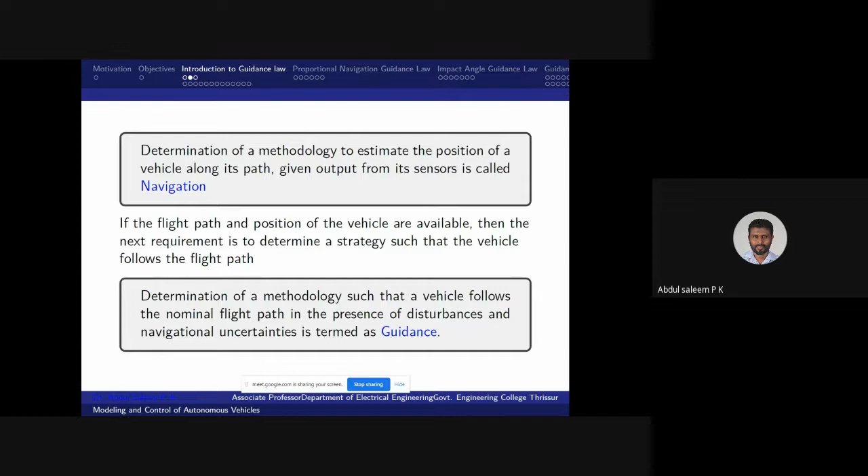Now we have to determine a methodology by which the vehicle can follow the nominal path. Suppose this is a nominal path. Then we have to develop a methodology by which the vehicle, that is the missile, is able to move along this path, or follow this path. That methodology, that strategy, is known as guidance.

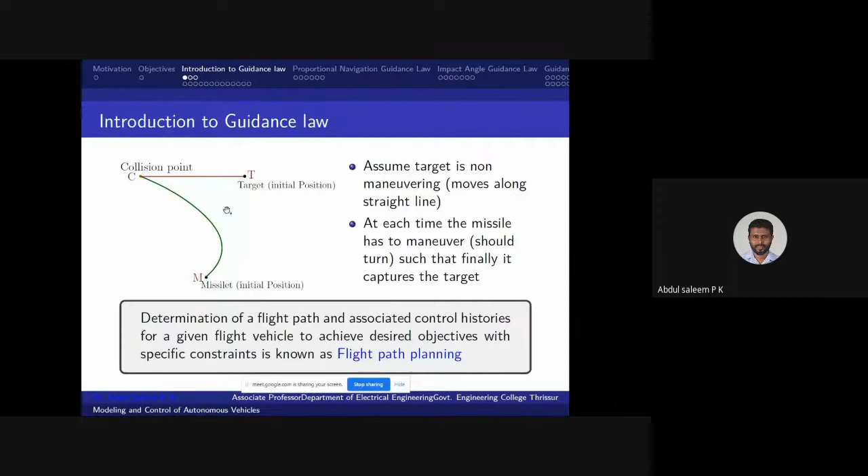Also, in order to achieve this, we have to make sure that the orientation, the angular orientation, is along a particular direction, and for that a control is required. But this is some basic concept about navigation, guidance, and control.

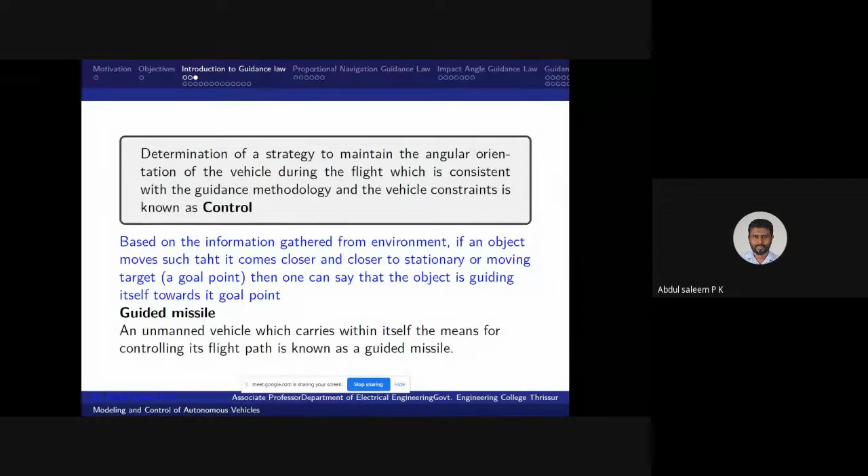Based on the information gathered from the environment, if an object moves such that it comes closer and closer to a stationary or moving target, then we can say that the object is guiding itself towards its goal point. A guided missile is an unmanned vehicle which carries within itself the means for controlling its flight path - this is known as a guided missile.

Now we can have some basic concepts on interception and avoidance. In the case of a missile, the primary objective is interception, that is, the missile should hit the target. Whereas in the case of robots, the main objective may be to avoid an obstacle. Therefore, these two things are actually two sides of the same coin. If we have a strategy that can be used for intercepting a target by a missile, then the opposite strategy can be used to avoid an obstacle by a robot.

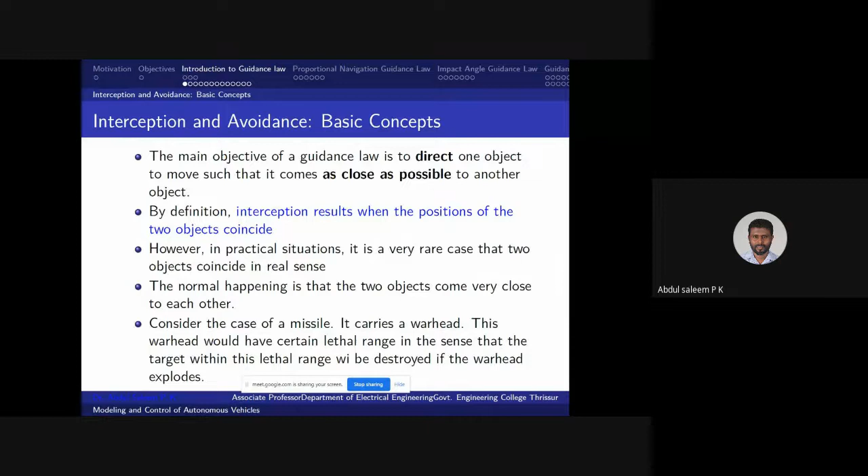Now we will discuss the engagement between two-point objects. Here we assume that we are not applying any guidance law. If we are not applying any guidance law, what is the condition so that a missile will hit the target? If we know that condition, we can develop a methodology such that this condition is satisfied. Once this condition is satisfied, we can ensure that the missile hits the target. Therefore, first we will consider a case where the missile is unguided.

So here we have a missile M and a target T. This is the directional velocity of the missile, and this is the directional movement of the target. We assume that there is no maneuvering.

Now we have some definitions. The distance between the missile and target is known as line of sight, usually denoted by the letter R, also known as range or LOS separation. The angle made by this LOS with respect to a reference, for example the x-axis, is known as the LOS angle, denoted by theta. The angle made by the velocity vector of the missile with respect to a reference axis is denoted by gamma, the flight path angle. Similarly, we can have the same definitions for the target also.

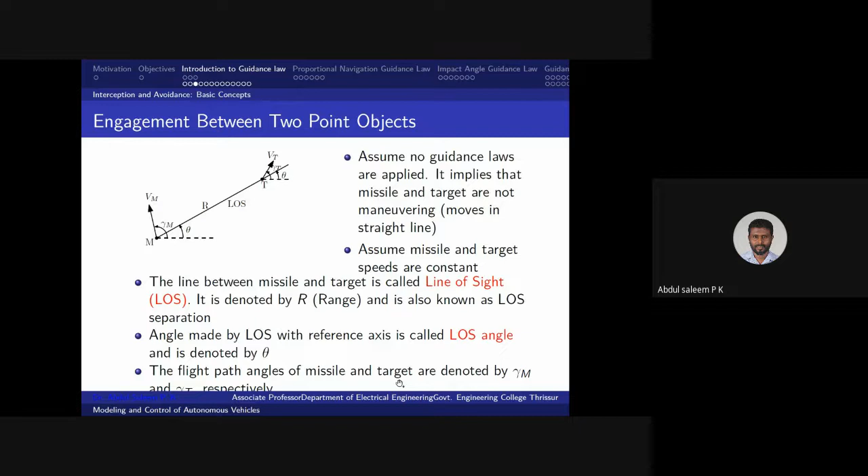Now we can think about the modeling of the kinematics of the engagement between this missile and target. What we are doing is that this velocity vector of the missile is resolved into two components: one along the direction of the LOS, and the other perpendicular to LOS. The same way, we resolve the target velocity also into two components, one along the LOS direction and the other perpendicular to LOS.

Therefore, this component VMR, the component of missile velocity along the LOS, can be obtained as Vm into cosine of this angle. But this angle is actually gamma_m minus theta. Therefore, VMR equals Vm cos(gamma_m minus theta). Similarly, we get V_m_theta equals Vm sin(gamma_m minus theta). In the same way, we can resolve target velocity into two components given by similar equations.

But here we assume that Vm, Vt, gamma_m and gamma_t are all constants. Therefore, the only state variables are r and theta. Therefore, in order to develop a mathematical model, we have to find r dot and theta dot.

So r dot is the velocity along this direction, dr by dt. But that is nothing but the target velocity minus the missile velocity components. Therefore, Vtr minus VMR is the velocity along this direction. So r dot will be equal to this expression, equation 1.

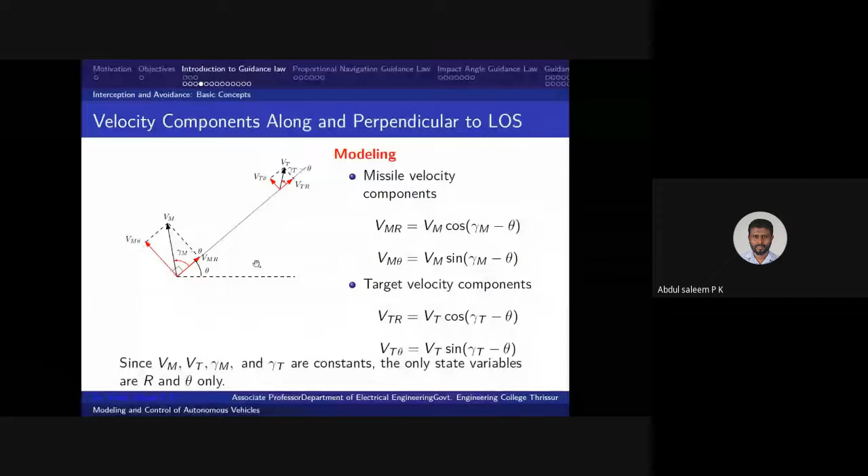In the same way, V_theta, which is also equal to r into theta dot, will be equal to the difference of the velocities along the direction perpendicular to LOS. This velocity component minus this velocity component will give you r theta dot. Therefore, these are the two state equations or engagement equations for this case.

Now, using these two equations, we can develop a methodology to derive the condition for capturability of the two vehicles, the missile and the target. For that, first we will obtain a V_theta-VR trajectory. V_theta is the velocity along a direction perpendicular to LOS, that is r theta dot, and VR is r dot, the velocity along the LOS direction. We can get many interesting results if we draw this V_theta-VR curve.

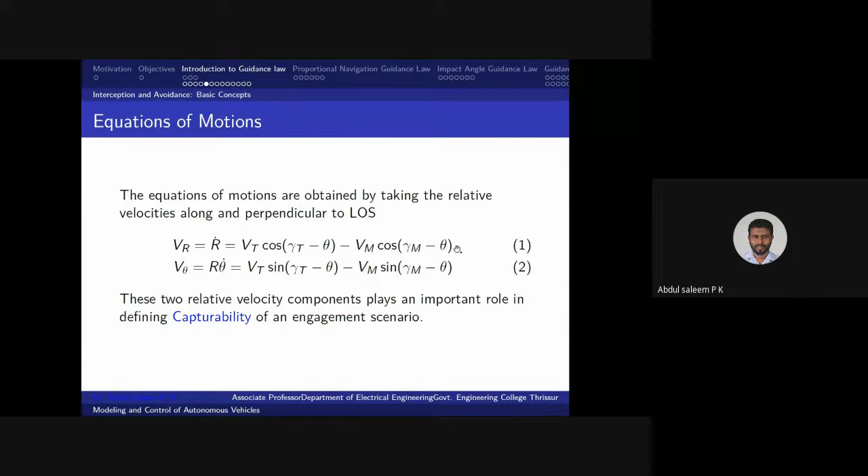For that, first we will find VR dot, taking the derivative of this equation, VR dot or r double dot. If you differentiate this with respect to time, we get Vt sin(gamma_t minus theta) into minus theta dot. Similarly, Vm sin(gamma_m minus theta) into minus theta dot. Therefore, we get an expression which can be simplified into theta dot into V_theta, because Vt sin(gamma_t minus theta) minus Vm sin(gamma_m minus theta) is what we already defined as V_theta. Therefore, we get an equation like this one.

Similarly, we can obtain the other equation, V_theta dot is equal to minus theta dot into Vr.

Now, in both expressions, we have theta dot. Therefore, from here, theta dot is equal to Vr dot by V theta. And from this equation, theta dot is equal to minus V theta dot by Vr. We have got this equation.

Now we can integrate both sides, and we will be getting Vr square plus V theta square is equal to C square. It is clear, it's obvious, that this equation represents that of a circle with radius C. How can we get C?

By substituting the initial condition, we can get the value of C, obtained by this equation. Therefore the trajectory Vr, V theta will be a circle of radius square root of Vr naught square plus V theta naught square.

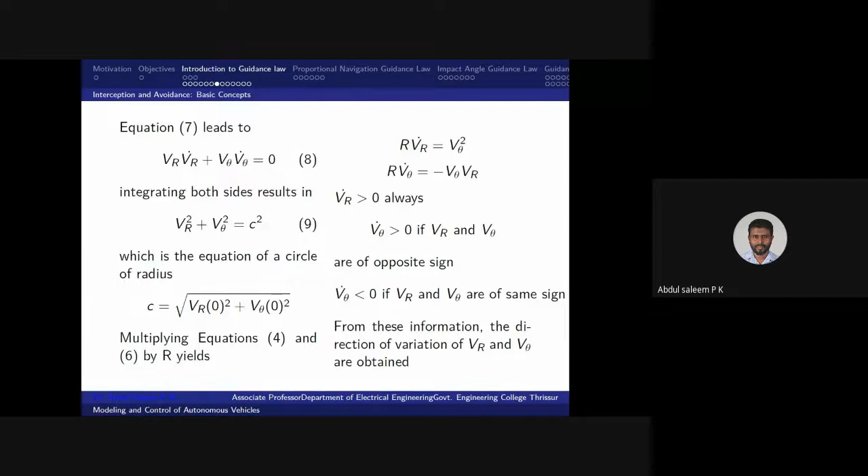That is, when V theta is equal to 0, both Vr dot and V theta dot are 0. So you substitute V theta equal to 0, then Vr dot is equal to 0, V theta dot is equal to 0. That is, once V theta is equal to 0, or theta dot is equal to 0, then it is a stationary point. After that, as time increases, the trajectory will not change, or the values of Vr and V theta will not change.

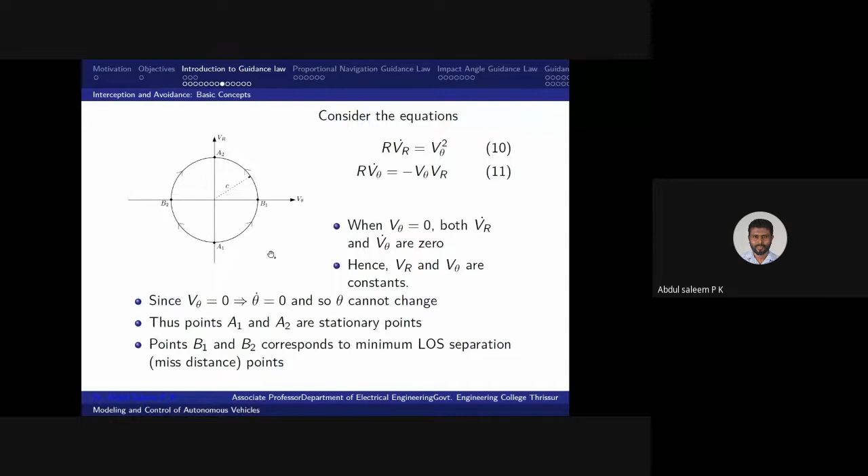Now we will see three different cases based on these discussions. I will show you one by one.

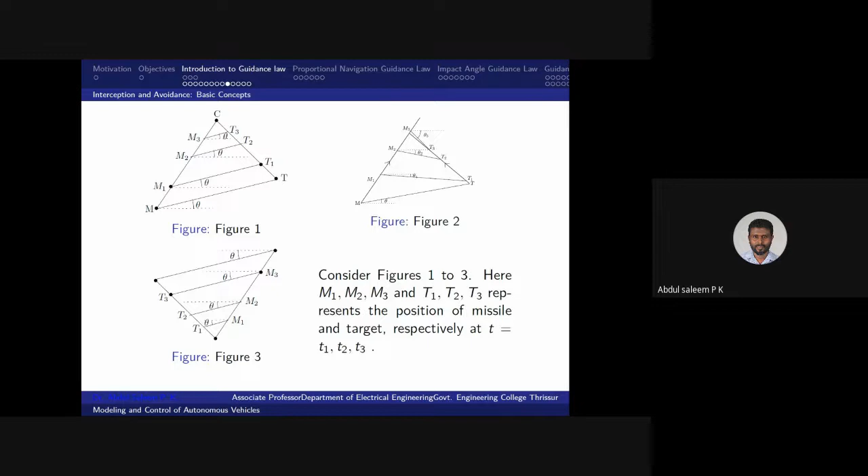First case: this is called a collision triangle. Initially, missile is here and target is here. Missile is moving along this direction and target is moving along this direction. At t equal to 0, this is the position. At t equal to t1, this is the position of the missile and target. The LOS angle, with respect to the x-axis reference axis, is theta. This is the case for t equal to t2 and t equal to t3. But you can see that in all these cases, theta is same.

There is no change in theta. If that condition is satisfied, then theta dot will be 0, that is, it is a stationary point. Then one more thing you can see is that as the engagement proceeds, the distance between missile and target is decreasing, and finally they will collide at this point.

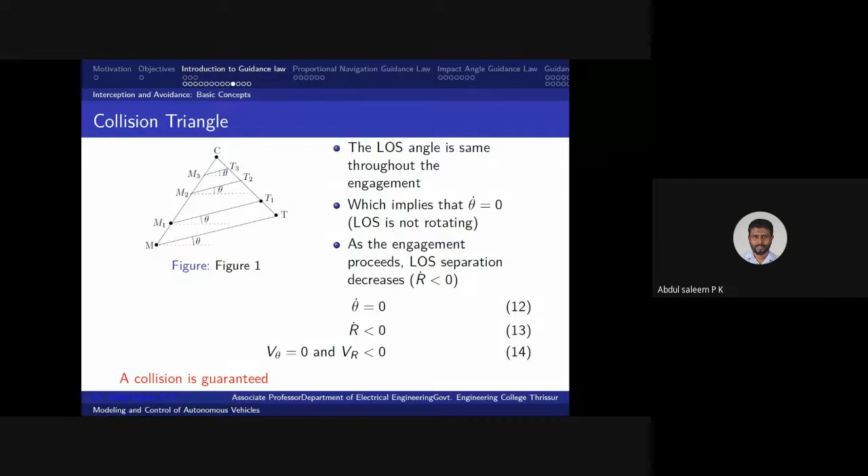From here we get an interesting result: in order to guarantee that a collision is possible or achieved, theta should not change. Theta dot should be 0, or theta should be constant. Also, the distance between missile and target should decrease as the engagement proceeds. Therefore, the conditions are theta dot equal to 0 and r dot less than 0, or v theta equal to 0 and vr less than 0. These are the conditions that must be satisfied in order to achieve a collision between missile and target.

Now, here is another case where we can see that the values of theta are not the same. They are different here. You can see that even though the values of theta seem to be increasing, it is increasing in the negative direction. Therefore, actually theta is decreasing, so theta dot will be negative in this case. Anyway, theta dot is not 0.

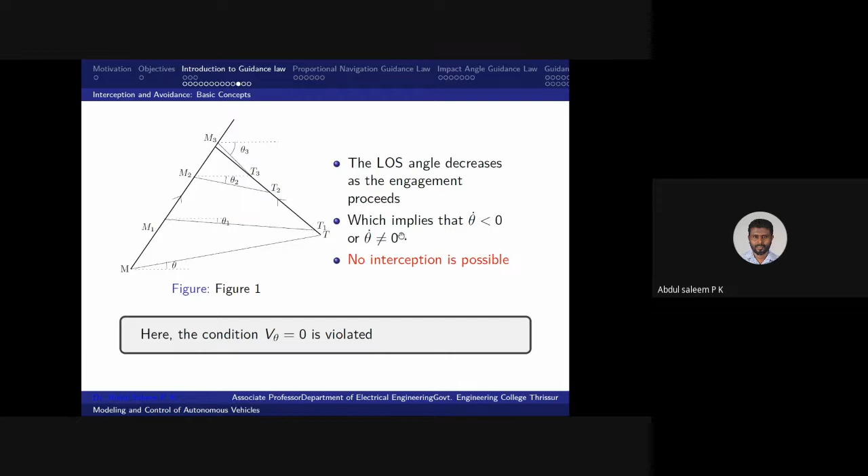Also, this distance between the target and missile is decreasing. That condition is satisfied, but the other condition, theta dot equals 0, is not satisfied. Finally, you can see that no interception is possible, because at this point the missile is here and the target is here only. Therefore interception is not possible. After some time, missile will go here and target will go this way. So collision is not possible in this case, because the first condition, theta dot equals 0, is not satisfied. Therefore, no collision.

The third case: here you can see that theta is the same throughout, that is, theta dot equals 0. First condition is satisfied. But this is the initial case, this is t equal to t1, t2, t3, etc. Here we can see that the distance between missile and target is increasing as the engagement proceeds, and we can see that it is not possible to have an interception.

Therefore, what we can conclude is that the condition for a guaranteed collision between the two is that theta dot should be equal to 0 and r dot should be less than 0. If these two conditions are satisfied, then definitely a collision will be achieved. If theta dot equals 0 and r dot is greater than 0, then no collision is possible. In that case, if avoidance is our objective, this condition can be used.

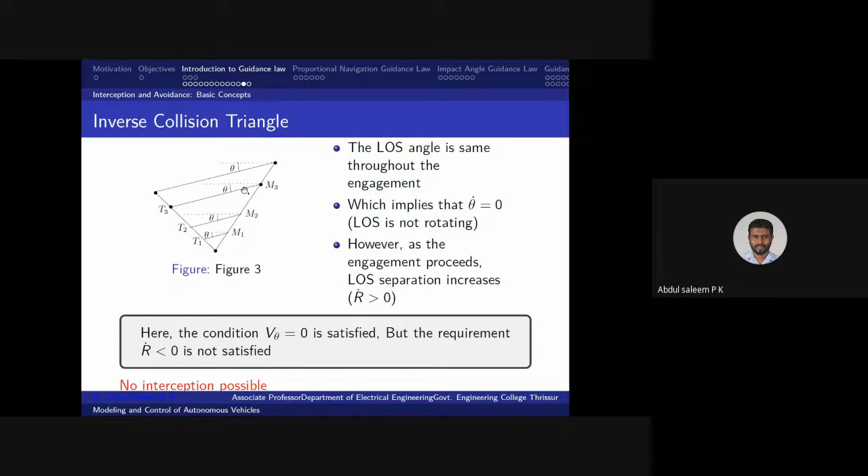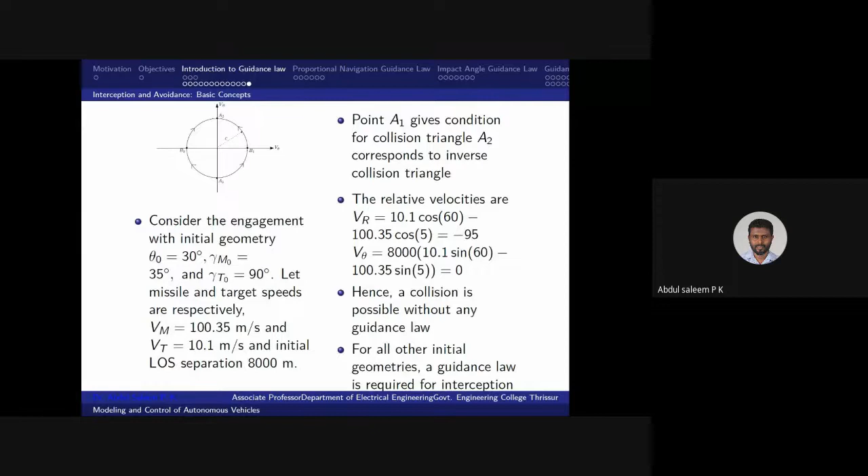Only for this particular initial condition is collision possible, provided you are not applying any guidance law. What we are going to do is apply a guidance law such that these two conditions are finally satisfied. Once satisfied, a collision will be possible.

Now we will discuss some guidance laws. One is proportional navigation guidance law, also known as PN guidance law. This is one of the most widely used guidance laws because it is very simple and easy to implement, and it is robust. Now we can see how this PN guidance law is developed, or what is the history behind it, the development of this guidance law.

Earlier, now we know that the mariners are using some sophisticated instruments, but in earlier days it was not so.

Therefore, what is the thumb rule that mariners were using to avoid a collision with other ships? There may be a number of ships, and each ship should make sure that it is not colliding with any other ship.

The thumb rule they used is: when a neighboring ship appears to be stationary and seems to be growing in size, a collision is imminent.

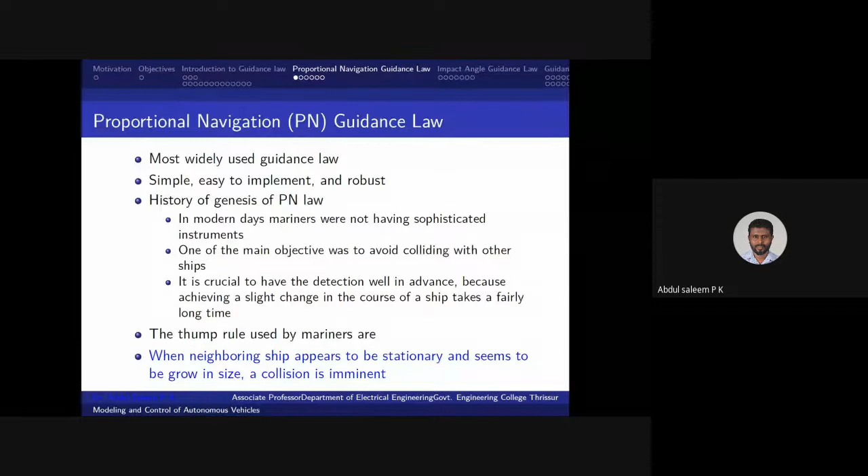That is, if the people in a particular ship feel that the other ship is stationary, and also feel that the size of the other ship is growing, then surely a collision will occur. But that is the analysis we can have.

The other ship appearing stationary with respect to our ship implies that the line of sight between the two ships is stationary, that is, the line of sight is not changing. If the other ship seems stationary, it means the line of sight between our ship and the other ship is constant, not changing. That is, theta is not changing.

V theta is equal to 0. And the second condition, that is, the size of the other ship seems to be growing, implies that the LOS separation between the two is decreasing. That is, VR is less than 0.

Actually, they were using these two conditions: V theta should be equal to 0 and VR should be less than 0. If these two conditions are satisfied, then they know a collision is sure, and therefore they have to maneuver such that a collision is avoided.

Actually, these are the two conditions which are necessary and sufficient to ensure that an interception of the missile with the target is possible. These two observations were used in designing the proportional navigation guidance law.

The second observation, VR less than 0, can be achieved if the missile is launched approximately towards the target or predicted collision point. If the target is moving, we find the predicted collision point, and the missile should be pointed towards that point. If stationary, the missile should be pointed towards the target point.

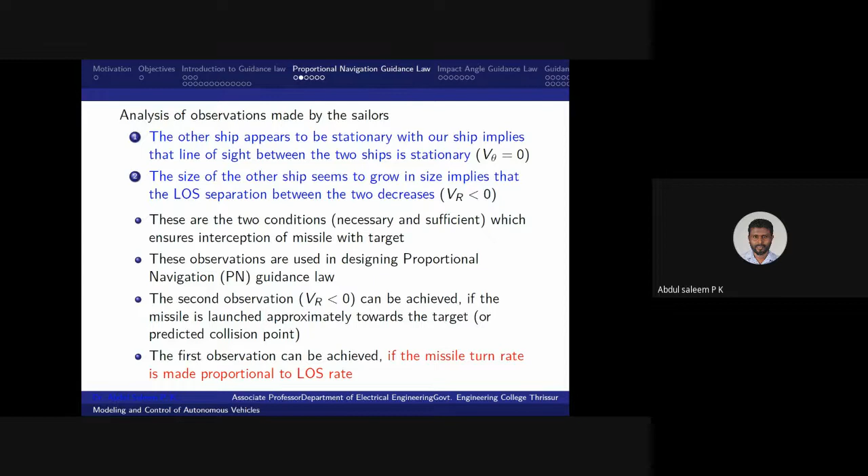If that condition is satisfied, then the first condition can be achieved. Therefore, we can write the guidance law as gamma m dot, the missile turn rate, proportional to the LOS turn rate theta dot, or gamma m dot is equal to n theta dot. This n is known as the navigation constant or PN constant.

Therefore, the lateral acceleration will be equal to this turn rate multiplied by velocity, that is, n Vm theta dot. This is the guidance command applied to ensure a collision between a target and missile is possible. This is known as the PN guidance law.

I will show some simulations.

So we can assume we have a missile target engagement with these initial conditions: initially the missile velocity vector is at 60 degrees, the target velocity vector is at 45 degrees, the initial LOS angle is 30 degrees, and the initial separation between the two is 7,000 meters.

Also, we assume the target velocity is 250 meters per second and the missile velocity is 400 meters per second. One more assumption: the target is non-maneuvering.

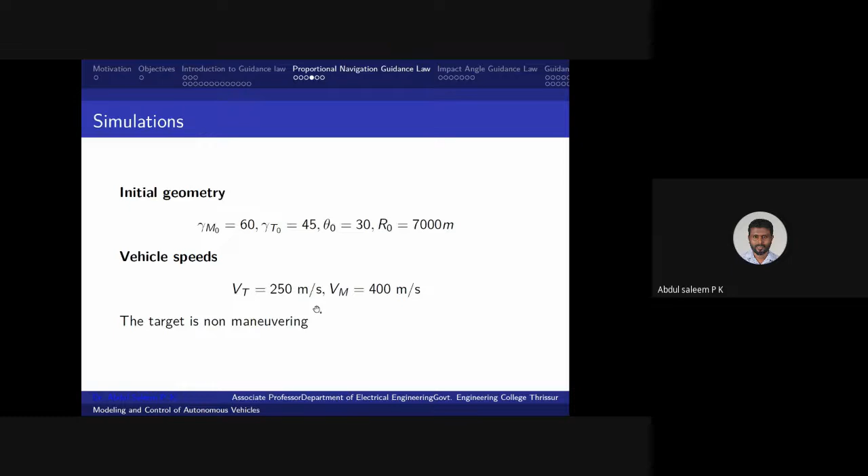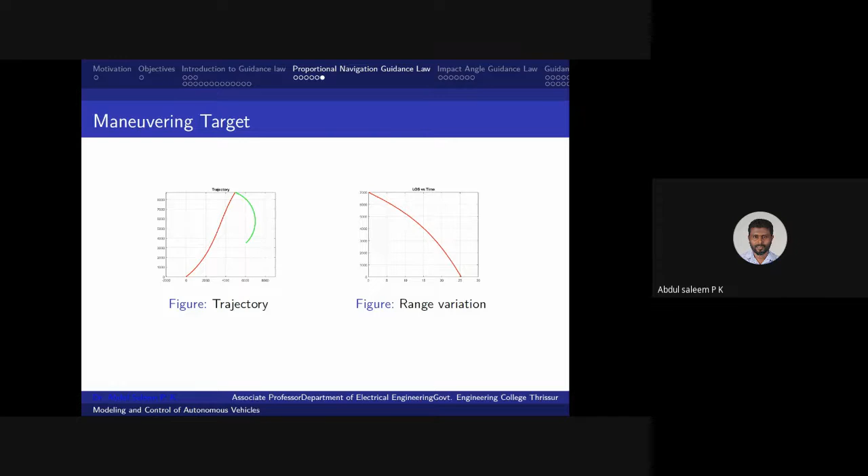There are a number of guidance laws. I am not going to discuss all of these guidance laws. If you are interested, you can go to the literature and see different types of guidance laws.

Now we will see the impact angle guidance law. Impact angle means the angle at which the missile finally hits the target. It can be 90 degrees, or 30 degrees, or 40 degrees, etc.

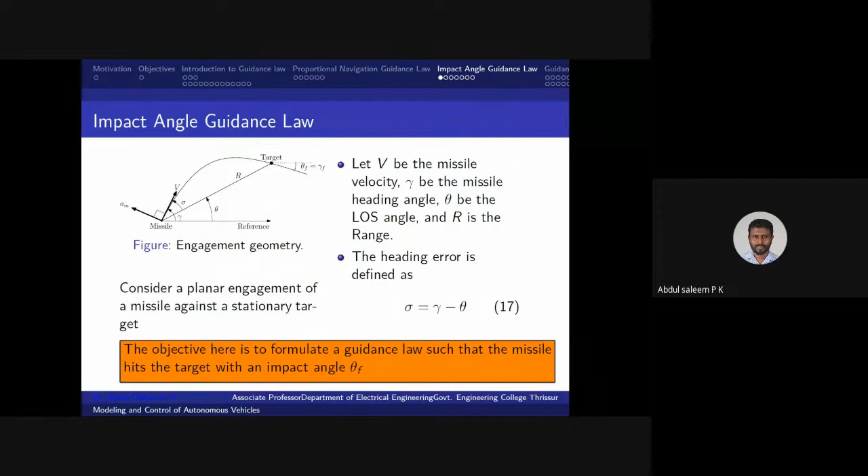See here, suppose this is a target, but we can hit it like this. If this is the reference, the angle is 90 degrees, therefore theta f is equal to 90 degrees. Or we can hit the target like this, in which case theta f is equal to 0. Or we can hit the target like this, then theta f is maybe minus 30.

The direction at which the missile hits a target is very important for destroying that target. Depending on which direction you hit along, the disaster will be more severe. Therefore, the final angle is important to achieve a more effective collision of the missile with the target, or to destroy the target. Now, how can we achieve this desired impact angle? That is the next discussion.

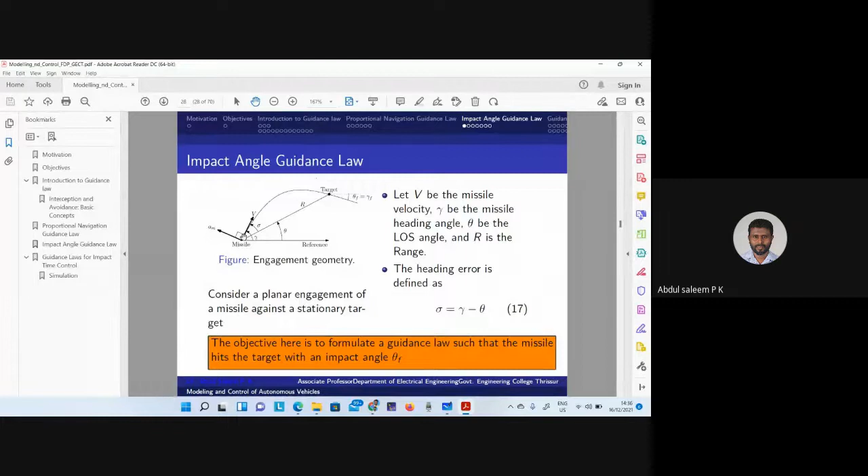Similarly, r theta dot is equal to minus v sin sigma. Why? Because here also the target velocity is 0 since it is stationary, and the component of this velocity along the direction perpendicular to the LOS will be equal to v sin sigma. Therefore we get minus v sin sigma equals r theta dot, or theta dot equals minus v sin sigma divided by r. And gamma dot is equal to n theta dot. That is the guidance law, that is, we are applying the PN guidance law.

If you are applying the PN guidance law, gamma dot is equal to n theta dot, and this expression will be changing with respect to the guidance law that we are using. But these two are the basic kinematics, that is fixed. This is the controlling factor. By changing this gamma or gamma dot, we are controlling the flight path. Therefore, different researchers will be using different guidance laws, and accordingly this gamma dot expression will be changing. Since we are using PN guidance law, we have written gamma dot is equal to n theta dot.

Now, in order to achieve a desired final angle, we need a relationship between the final impact angle and the navigation constant n. If you get such a relation, then you can compute the value of n and use it. That is the idea being used here. For that, we can integrate, but before that we can do something.

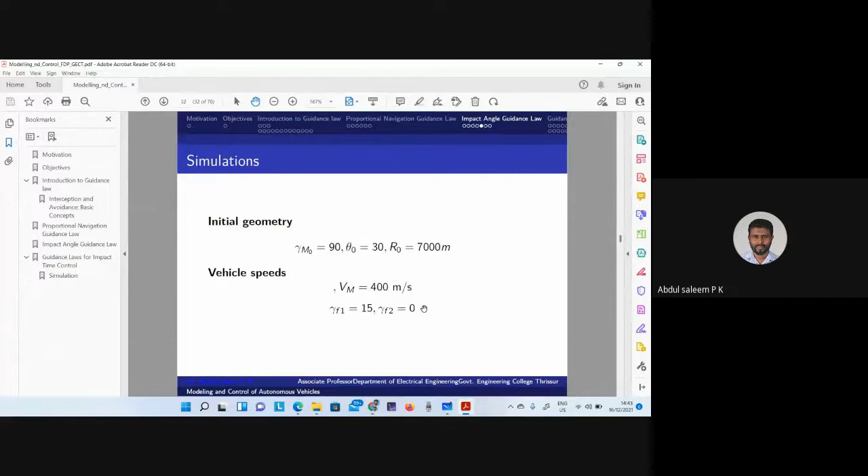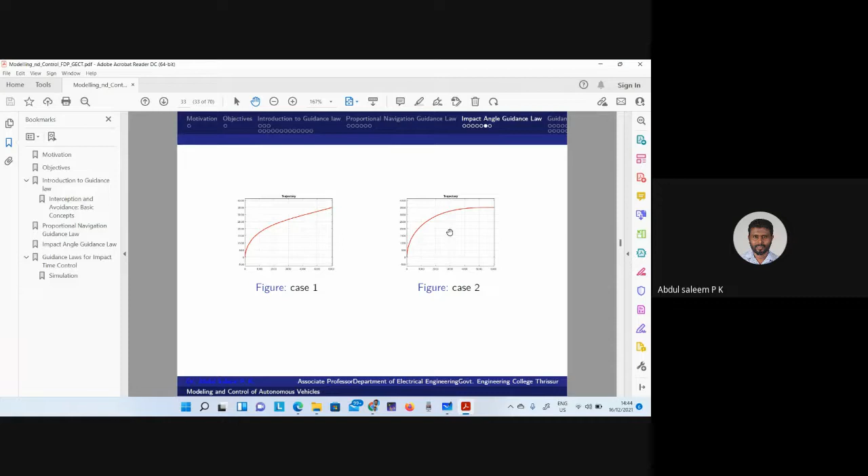And for the second case, our objective is that the desired final angle should be equal to 0 degree. It is very obvious that it is achieving 0 degree at the interception time. Therefore, by using this methodology, we can achieve a desired impact angle.

The strategy we have used is that our guidance law is N*V*theta_dot, where the value of n is computed such that we achieve a desired impact angle. For that, we should have a relationship between n and gamma_f, which also depends on the initial conditions.

That formula we have obtained here. Therefore, if you compute n using this formula - sigma_0 known, theta_0 known, and gamma is our desired final impact angle - substituting these values, you get the value of n. And if you use that n, you will be able to achieve the desired impact angle.

But there are some issues. If you are using PN guidance law, there is a condition that n should be greater than or equal to 2, otherwise your final acceleration will be infinity. I am not going to discuss that, but note this result: n must be greater than or equal to 2.

So if you substitute n equal to 2 here, this will be theta_0 minus sigma_0. But that is the minimum possible final impact time, the minimum possible value being theta_0 minus sigma_0.

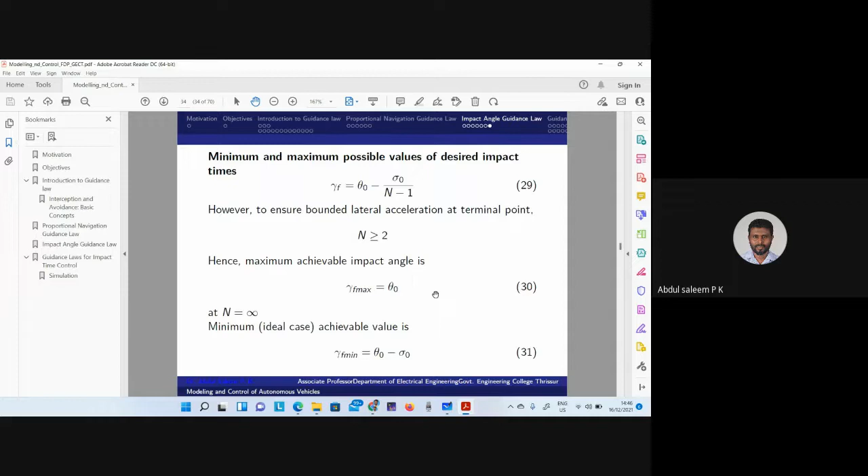Therefore, there are some limitations if you use this methodology, and there are so many papers in literature where they were able to achieve the full 360-degree impact angle, meaning any desired impact angle is possible. Some guidance laws were developed for this; you can see some papers in the literature.

And finally, we will discuss guidance laws for impact time control.

As I explained earlier, the primary objective is that the missile should hit the target. But besides this main goal, there are some other constraints. For example, the impact angle constraint that we have seen, and also a constraint on the time at which the missile hits the target.

For example, suppose I say that my missile should hit the target at t equal to 20 seconds. But there is a constraint: it cannot be 21 seconds, it cannot be 19 seconds. It should reach there exactly at 20 seconds. Why so? I will explain.

Suppose a ship of an enemy nation is coming to attack our country. Then we should destroy that ship, and for that we may launch a missile to destroy that missile. But that ship has some self-defense mechanism known as Close-In Weapon System, CIWS.

By using this mechanism, the ship is able to destroy the missile that we have launched. Therefore, our objective is not satisfied - we have failed to achieve our goal.

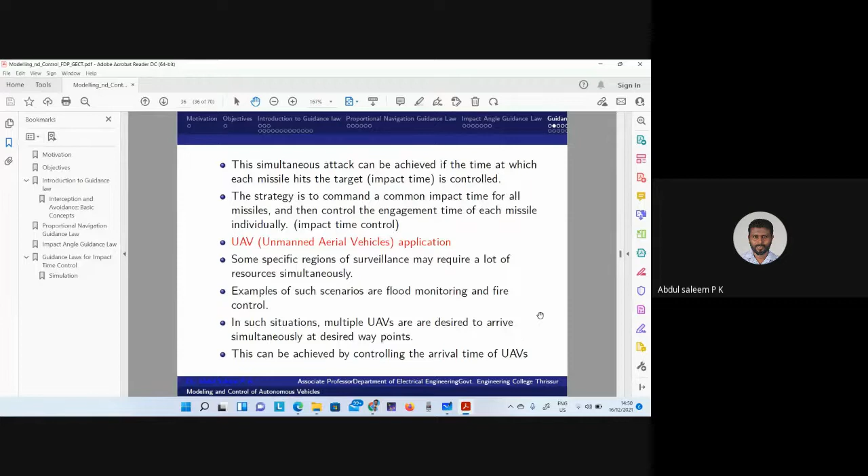One method is that we will control each of the missiles individually such that they are all commanded with a common impact time. For example, suppose I have 4 missiles and I am commanding my desired impact time as 30 seconds for all the missiles, and I am applying this guidance strategy. Then each of these missiles will move using the guidance command applied to it, and all of them will reach the target point at t equal to 30 seconds, and they will succeed in their mission. That methodology is used in this explanation.

The objective is that we have to develop a formula for AM so that it will satisfy two conditions: one, it will hit the target; second, it will hit the target at a desired predefined impact time. The objective is to find a proper guidance law governing AM, which can guarantee a desired impact time TF. By using this guidance law, we should be able to have a simultaneous impact of multiple missiles at that predefined impact time TF. That is our objective here.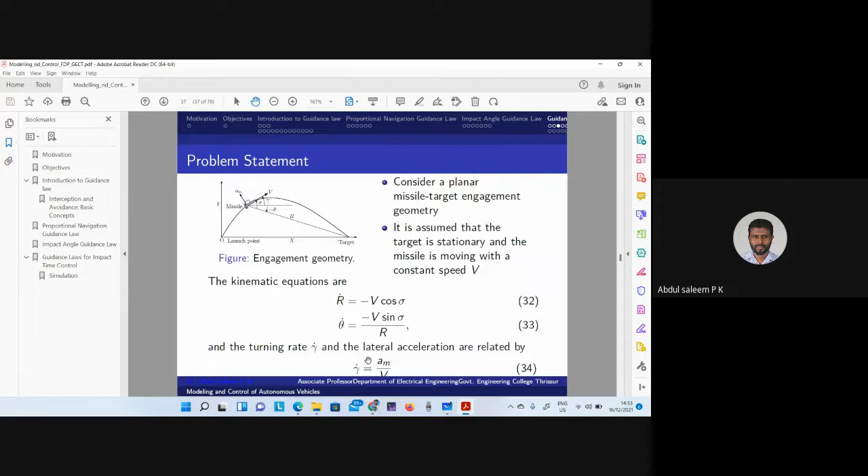Now, if the velocity of the missile is constant throughout, or if we consider the average velocity, then we can see that a missile moving along the longer path will have maximum impact time, and a missile moving along the shorter path will have minimum impact time. Therefore, in order to get different impact times, we can vary the path lengths. Path lengths can be varied by varying the turn rate gamma dot, and gamma dot can be varied by varying the lateral acceleration AM. Therefore, our objective is to find an expression for AM so that a desired gamma dot is obtained, and thereby we will be able to achieve the desired impact time.

Now, first we can go for PN guidance law. The PN guidance law guidance command is A equal to N V theta dot. Now, the parameter we can vary theta dot by is N. As we have done for the case of impact angle, we should be able to get an expression for N, which is a function of the desired impact time. Then we will be able to control the final arrival time of the missile. But we can see whether it is possible or not.

This is the PN impact time. You can calculate the expression for the impact time using the PN guidance law. For this, we have already seen these equations. This is the heading error, gamma minus theta. Actually, we want to control gamma dot. But gamma dot can be controlled by controlling sigma dot or theta dot. But theta dot we cannot control, it is a kinematic equation.

Therefore, the only thing is that we can control sigma dot. By controlling sigma dot, we will be able to control gamma dot, and thereby we will be able to control the turn rate, and thereby we will be able to get different path lengths, so that different types of impact times can be achieved. I have already explained how this expression is obtained: sigma dot is equal to n minus 1 theta dot.

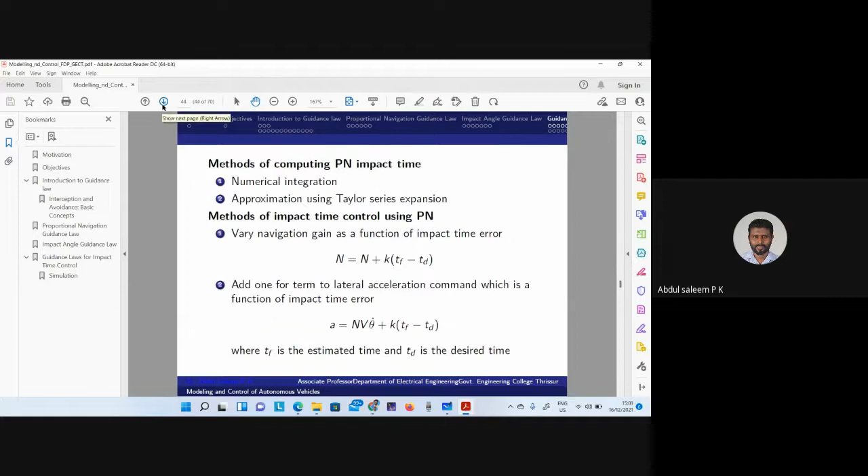Then how can we solve this issue? Our research problem is: can we formulate a guidance law such that an exact closed-form solution for the impact time is possible? Also, the impact time can be controlled by a parameter which is an exact closed-form expression in terms of the desired impact time. This is the research problem that is addressed to me.

Fortunately, or for my luck, I was able to solve this problem, and I will explain how this problem is solved.

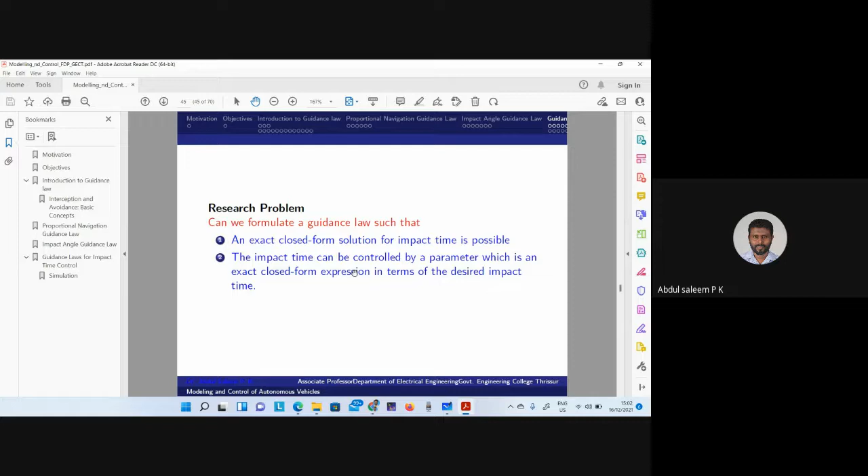Now I will explain the control formulation. I assume that my initial heading error is between this range, minus pi by 2 and plus pi by 2. That is my assumption. I am proposing a two-phase variation in the heading error sigma as a function of the range R, as shown by equations 46 and 47. There are two phases. In the first phase, the heading error varies according to this expression.

In the second phase, the heading error will be 0. This is up to fR0. If your range, initially R0, is decreasing, and when the range reaches fR0, where f is between 0 and 1, a fraction - suppose f equals 0.8 and R0 equals 10,000, 0.8 into 10,000 is 8,000 - if the value of r reaches 8,000, then this will be 0. After that, the heading error is 0 throughout.

This is the variation in heading error that I assume satisfies this equation. Why have I chosen this equation? We can see later that if I choose a heading error variation as given by these two equations, then I'll be able to integrate an expression for impact time. That is the objective. I am proposing a function - a variation for the heading error - such that that function is integrable.

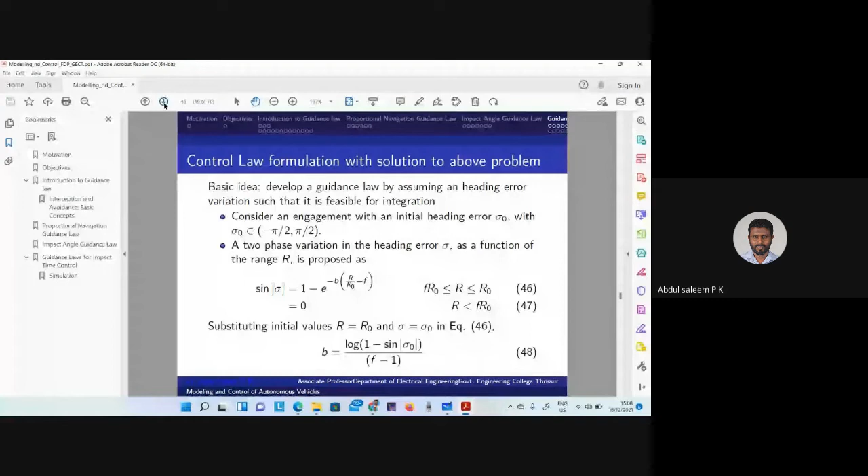Now we can derive the expression for impact time. This was our expression: d sigma by dt is equal to this expression. Therefore, I can take the terms containing sigma to this side and dt to this side. Then we get an expression like this: minus v dt is equal to r0 by b into sine sigma by 1 minus sine sigma d sigma.

Now this is easily integrable: minus v into integral from 0 to tc, because at r equal to f r0, the time is tc only. So integral 0 to tc dt is equal to r0 by b, integrated over sigma from sigma 0 to 0. Initially the heading is sigma 0, and finally at the end of the initial phase, sigma is equal to 0. So the sigma variation is from sigma 0 to 0, and this is the expression. You can see that the expression d sigma by 1 minus sine sigma is easily integrable, and the integral is 1 minus tan sigma 0 minus sec sigma 0, divided by v.

That is, we have got a closed form expression for tc. For the first phase, we have got a closed form expression for this, tc. Now we can find the expression for impact time for this one, that's tf minus tc.

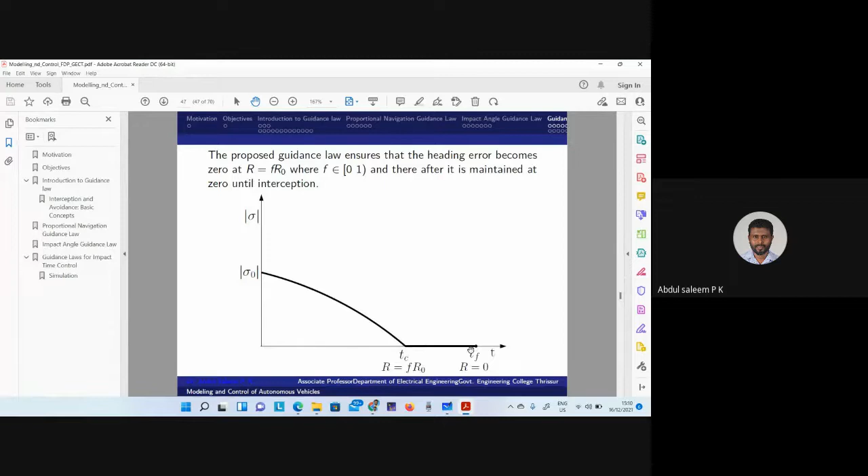Phase 2, the heading error is 0. Therefore, heading error 0 means it is moving along a straight line. There is no curved path. In that case, the time is just distance by velocity.

But distance is f into r0, because at that time r is equal to f r0. The distance is f r0, speed is v. Therefore, if you divide f r0 by v, you get the time for the second phase. The total time is the sum of these two times, giving an expression like this.

This is a closed form expression for the impact time. It contains the parameter f, it contains the expression for the desired impact time, and it is exact. Therefore, now we have to find an expression for the control parameter as a function of the desired impact time, which we can obtain from here.

Before that, I will find the maximum and minimum possible impact time. For that, I should know how the impact time varies as a function of f, where minimum value of f is 0 and maximum value is 1. As f increases from 0 to 1, how does the impact time vary, increasing or decreasing or remaining constant? To know that, we can take the derivative of this function with respect to f.

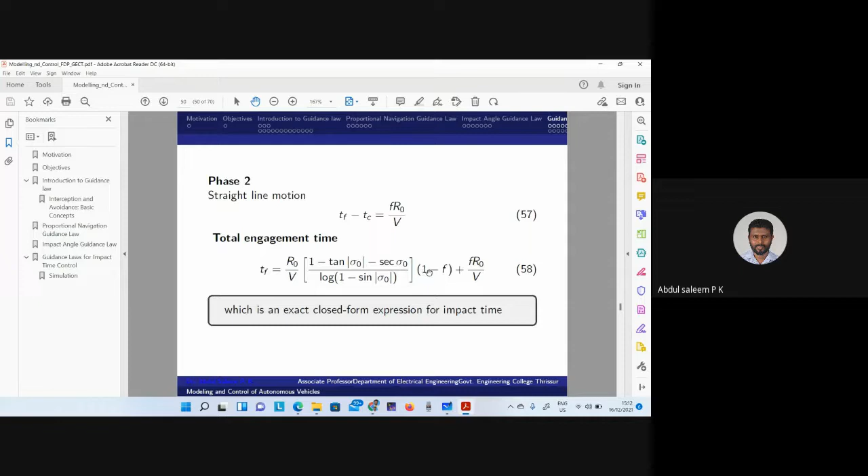Now these two can be substituted in this expression. This can be written as tf max and tf min, so tf equals tf max into 1 minus f plus tf min into f. That expression is written here. Therefore, we have a simple expression for the impact time: tf is equal to 1 minus f into tf max plus f into tf min.

Tf max and tf min can be obtained by computing using these expressions, so we can find tf min and tf max. From this we can get an expression for f. This expression is closed form and exact. Therefore, we have an exact closed form expression for the control parameter f.

F is a function of the desired impact time and also the initial condition, because tf max and tf min are functions of the initial conditions. Thus I have developed a guidance law where we have an exact expression for impact time, an exact closed form expression for this control parameter, directly related to the desired impact time.

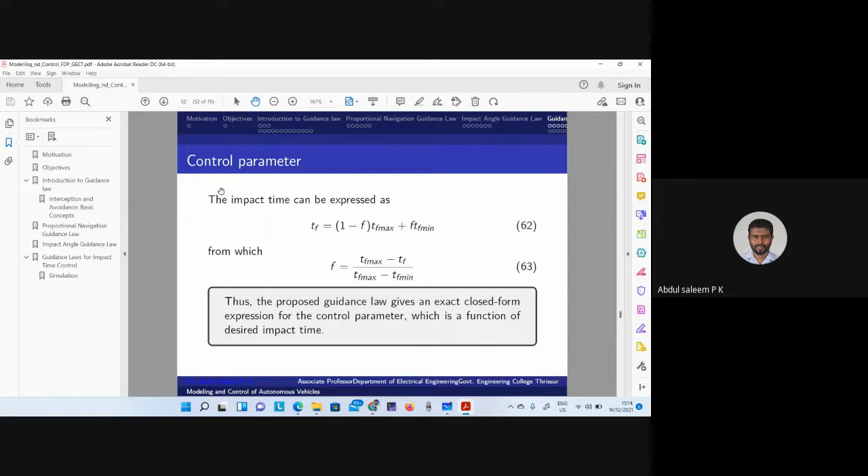Therefore, if your desired impact time is 30 seconds, you just put tf equal to 30 seconds here, compute f, and substitute this f value in your guidance law. You will be able to achieve a collision exactly at tf equal to 30 seconds. But the only constraint is that the tf you select should be between the tf max and tf min computed by the above two expressions.

Therefore, the guidance law algorithm is: first compute tf min and tf max using those equations, then get a set of permissible values of tf. But tf min is not actually achievable since it is an ideal condition requiring the lateral acceleration to be infinity. Any value greater than tf min is possible, and tf max is also possible. So it is a closed bracket on one side and an open bracket on the other.

Now select a tf from this set S. Then find the control parameter using that equation, compute B using equation 48, and generate AM by substituting this f and B. You will be able to achieve the collision with the exact impact time.

As I explained in the case of the impact angle problem, here also there can be disturbances or autopilot dynamics by which the achieved acceleration may not be the same as the commanded acceleration. There will be some time lag between the achieved acceleration and the commanded acceleration. Therefore, our guidance law fails to achieve the desired impact time if you use the guidance law that we obtained earlier. If you use this algorithm, then you will fail to get the desired impact time and collision because of this autopilot dynamics.

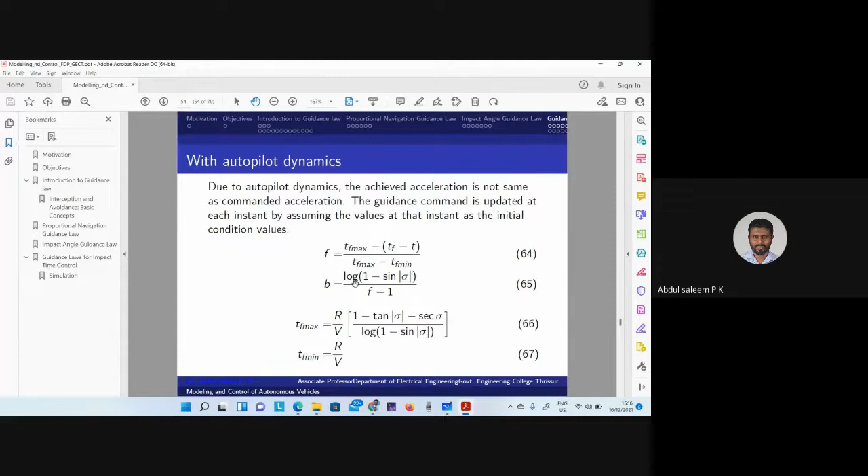Now we can see some simulations. These are the initial engagement and velocity of the missile. The initial position of the missile is at 0, 0. First we find TF min and TF max, and they are obtained as 25 and 30.0741 seconds, and we can choose a time in between these two. That is, from this set we can choose a time. I have taken 28.4 seconds as my desired impact time.

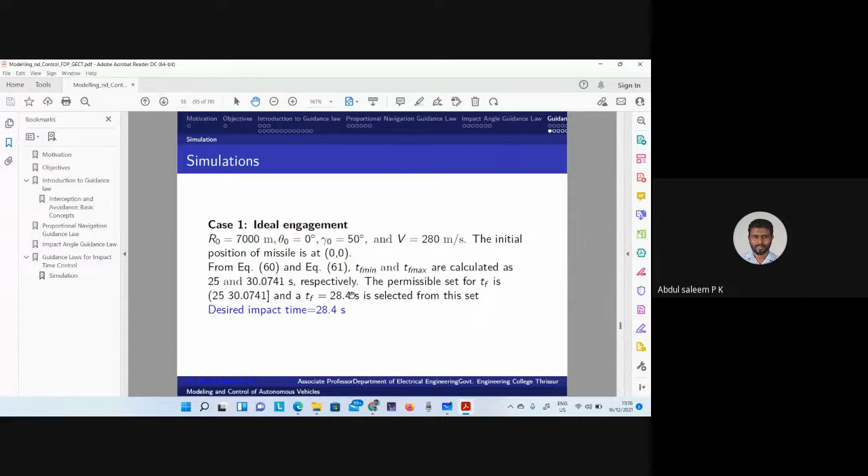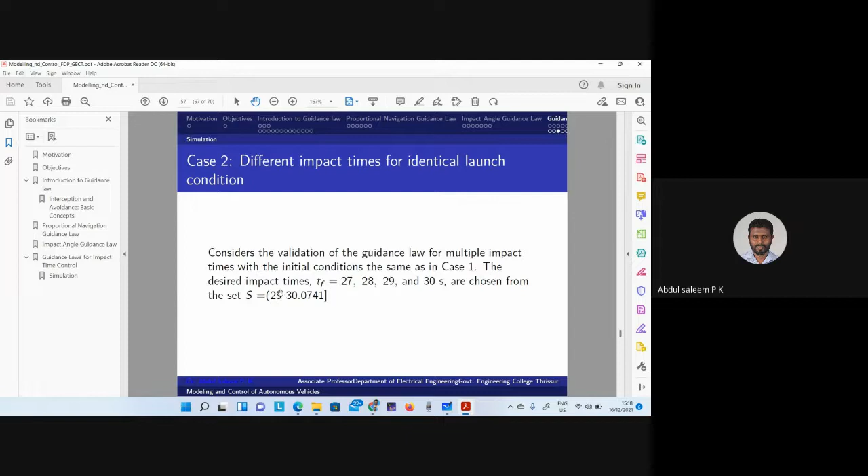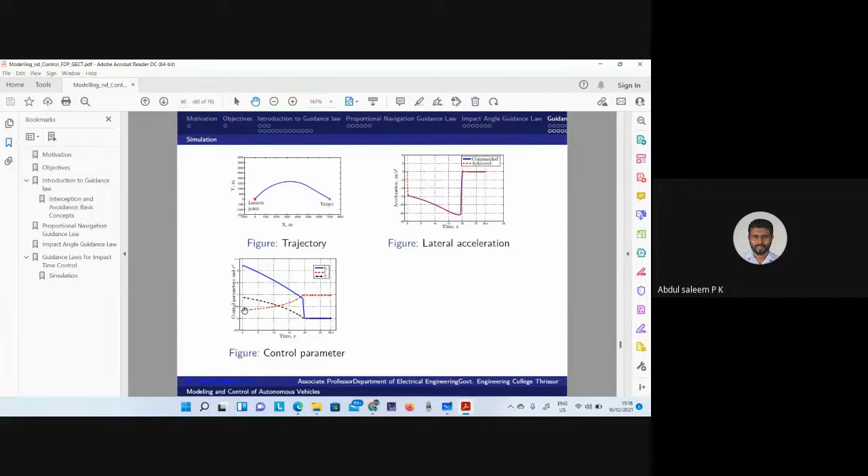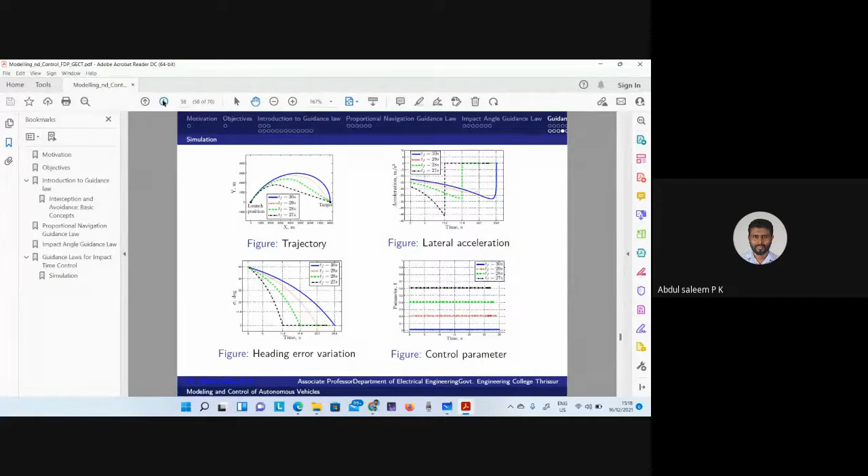Now, feedback control with autopilot delay. We assume that an autopilot delay of 2.2 seconds is present. In that case also, our guidance law is able to achieve collision at exactly the desired impact time of 28.4 seconds. But you can see here that the control parameters are varying, not constant, whereas in the ideal case the control parameters are constant - B and F are constant there. But if you consider feedback control, the control parameters are not constant.

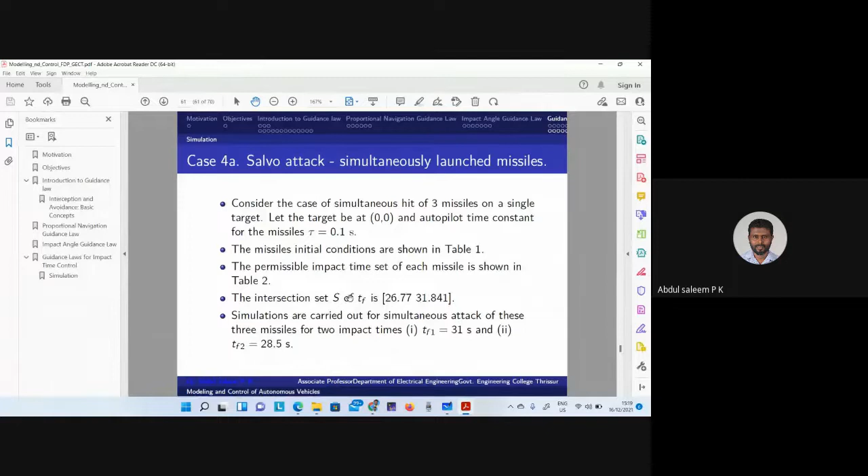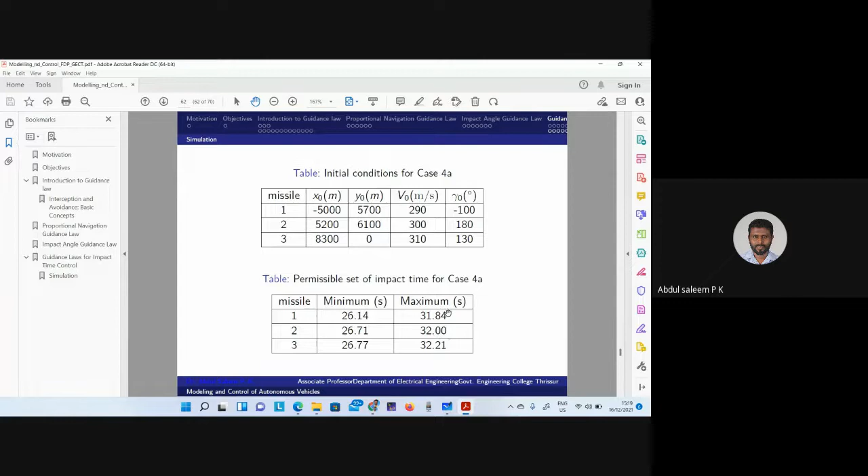Now, salvo attack means we have to achieve a simultaneous attack of all missiles. What we can do is find the impact time set of each of these individual missiles, then find an intersection set, and choose a desired impact time from this intersection set. This is an example showing the minimum and maximum impact times for missile 1, 2, and 3. From this, we have to consider the intersection set. Therefore, the maximum value is 26.7, and the minimum value is 31.84. Between these two, we have to select an impact time. You can see that all the missiles are able to reach the target point at exactly the same time.

Okay, this is another way of achieving the simultaneous attack. Here we are not launching all the missiles at the same time. They are launched at different instances of time, maybe from the same location.

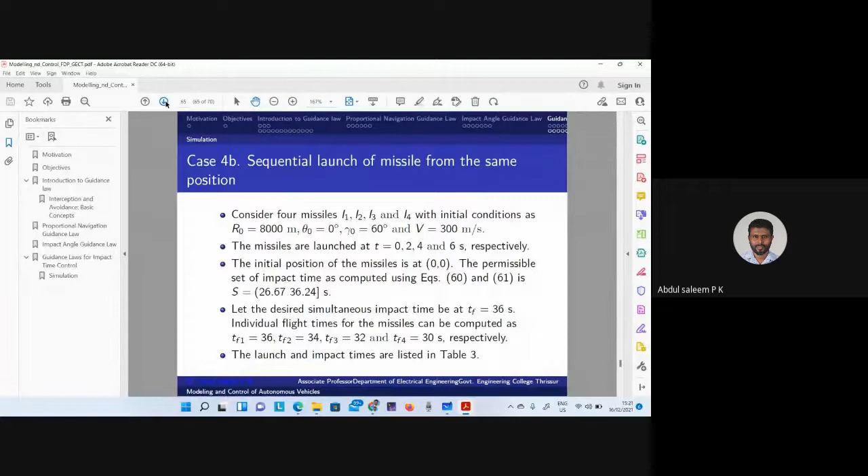Suppose missile 1 is launched at t equal 0 second, missile 2 at t equal 1 second, missile 3 at t equal 2 second. Suppose the desired impact time is 30 seconds. Then for the first missile, the commanded impact time is 30 minus 0, that is 30 seconds. For the second missile, it should be 30 minus 1, 29 seconds. For the third missile, it should be 30 minus 2, 28 seconds. If the missiles are commanded with these impact times, then they will be able to achieve the desired simultaneous impact time.

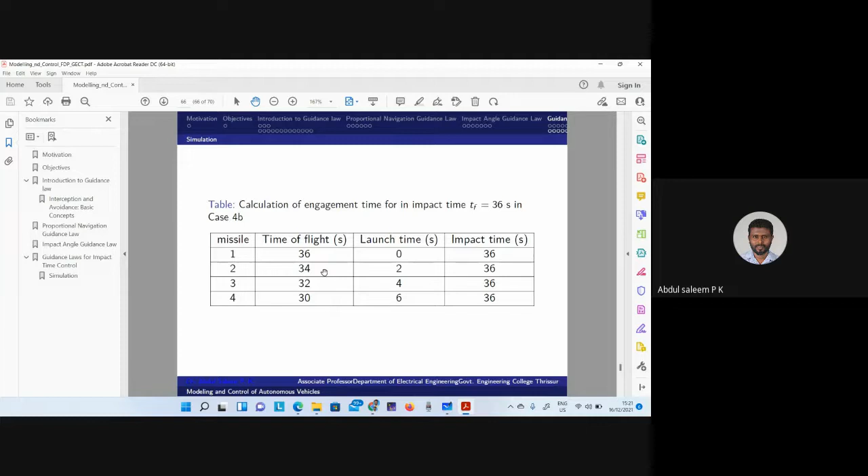You can see here, we want 36 seconds, that is, all the missiles should reach the destination point at 36 seconds. But they are launched at 0 second, 2 second, 4 second, 6 second. Therefore, for this one, the engagement time is 36. For this one, it is 34 seconds, an engagement time, because it is launched at 2 seconds, and 34 plus 2 is 36. Similarly, you can see here also.

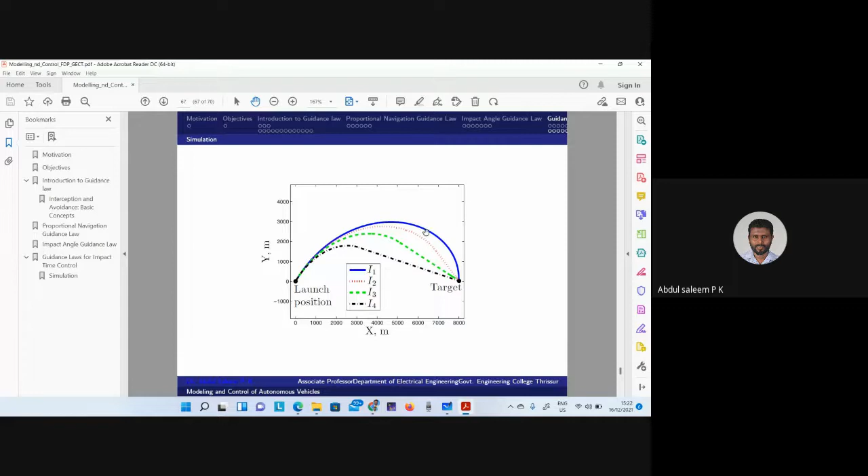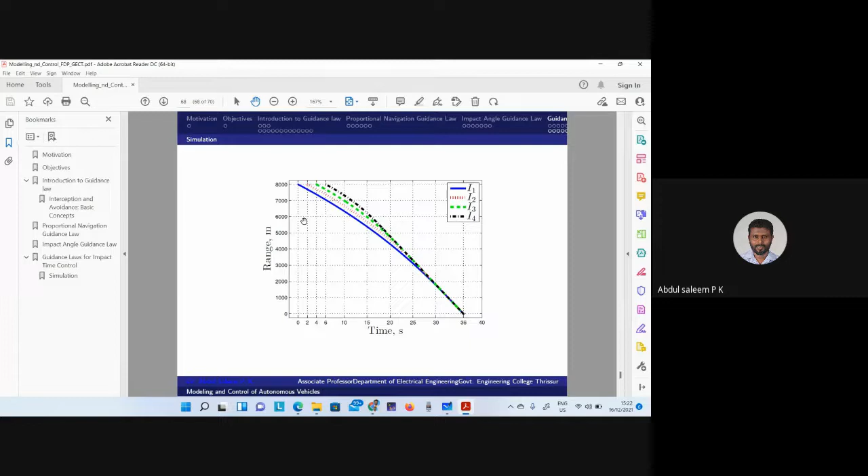No doubt, sir, hello. Yeah, Srija. Yes, sir. My doubt is, if the target is a maneuvering one, how do we incorporate all those complexities into this impact time and impact angle guidance laws?

Okay, but that is a really challenging problem. If the target is maneuvering, I think nobody has solved that problem fully. But if it is maneuvering, if it is possible to predict the interception point, then we can consider that interception point as a stationary target, and apply the same guidance law that we have developed here. Otherwise, this guidance law, not only this one but all the guidance laws developed so far, will fail. I haven't seen any research work that can solve the case where the target is maneuvering.